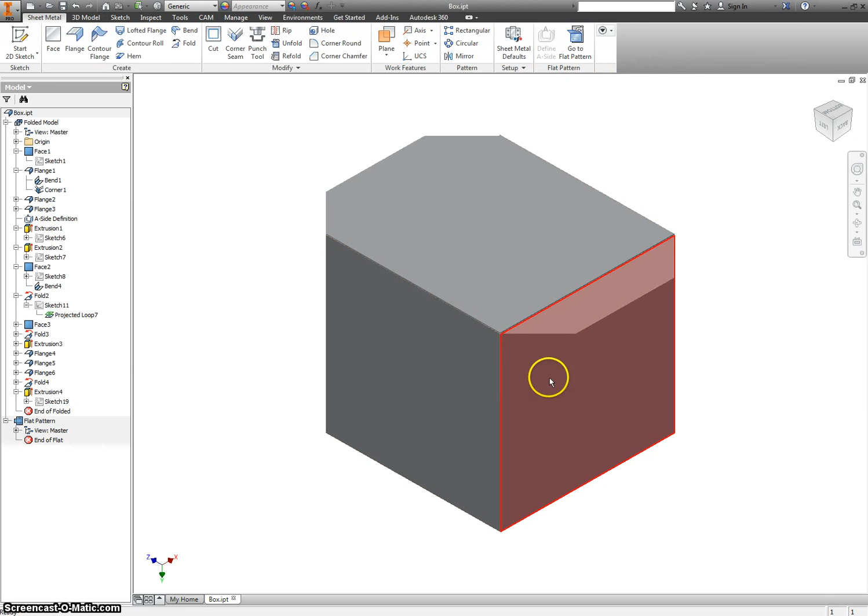Now that you've made your puzzle cube, you're going to want to make a case to put it inside of. While most teachers would have you make something on Microsoft Word with a flat pattern like this, I'm going to teach you how to use another feature of Inventor called Sheet Metal, where you can actually make a 3D box and go to a flat pattern of it. If you have a laser engraver, like we do, you can cut these out in a matter of seconds, and then you can just fold up your box, tape it up, and you're good to go.

So to do that, let's exit out of this for a second. Let's go to New, and we're going to choose Sheet Metal and Create. The first thing we're going to do is say how thick our sheet metal is. We're not using sheet metal, we're using paper, so it's going to be really thin, 0.0025.

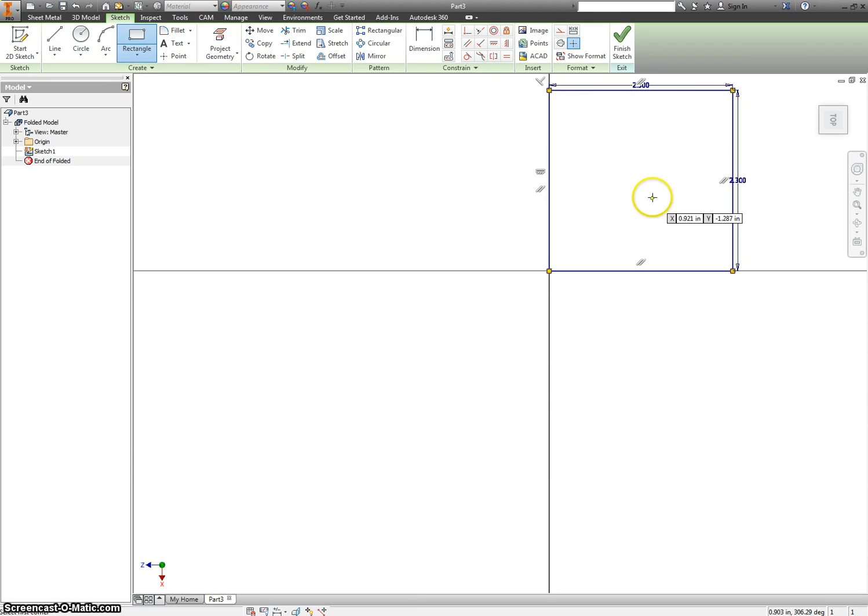Let's go to our 2D sketch. We want to pick the bottom plane here. You may have to actually measure your puzzle cube and see how wide it actually is. It's supposed to be 2.25, but I'm going to say 2.3, because when you glue up some of the pieces and put them together, you end up having gaps. They don't go as nicely together as it does on the computer. So you have a 2.3 by 2.3 square.

You finish your sketch, and instead of extrude, now we have different features up here. We're going to use Face, and hit apply.

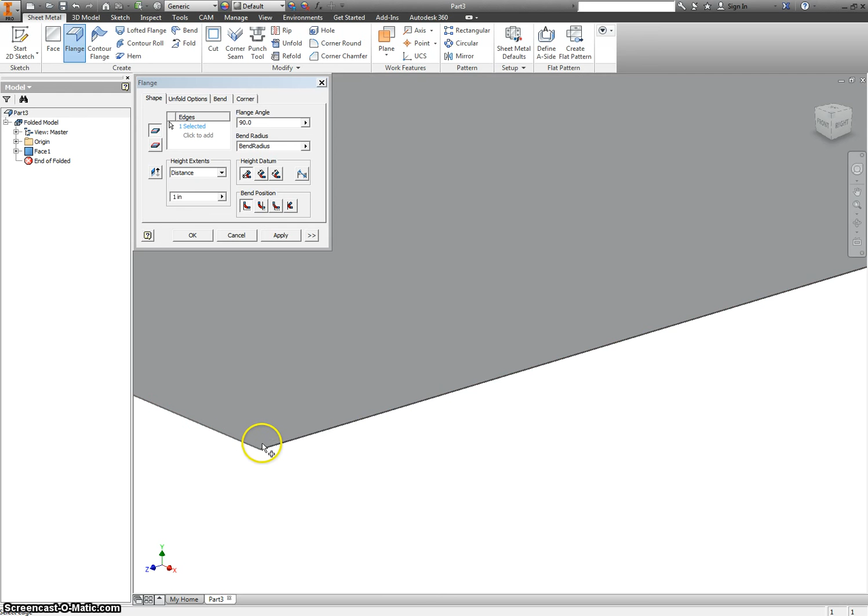Now we're going to add a flange. The flange is going to be on this edge here, and the top edge, so you have a top and a bottom. We're going to make the flange also the same as your bottom, so for me it's 2.3.

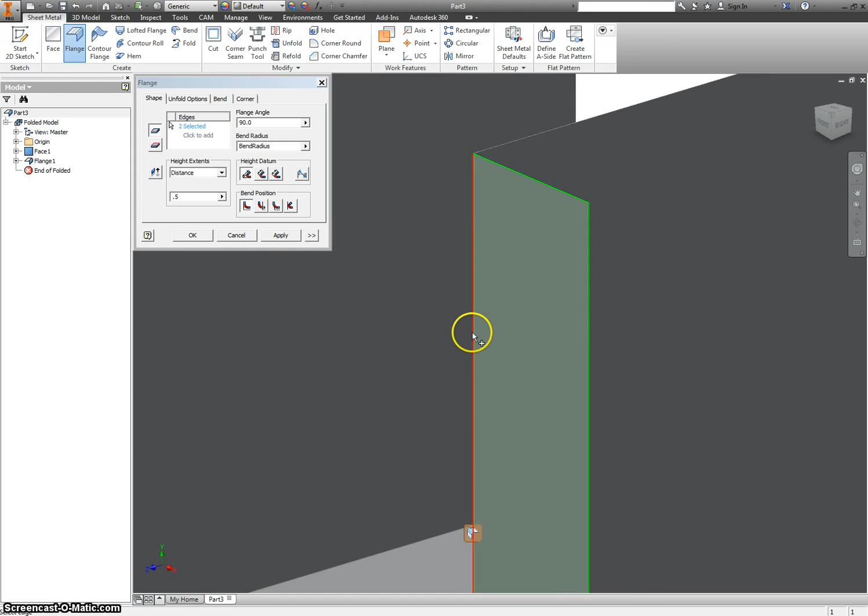We're going to add another flange onto this, and this is going to be much smaller though. We'll say a half inch. We'll pick this inside part here. Oop, got the wrong one. If I hold down Control, I can unselect. There we go. And one last one. Got the wrong one. There we go. So we have a half inch flange all the way around.

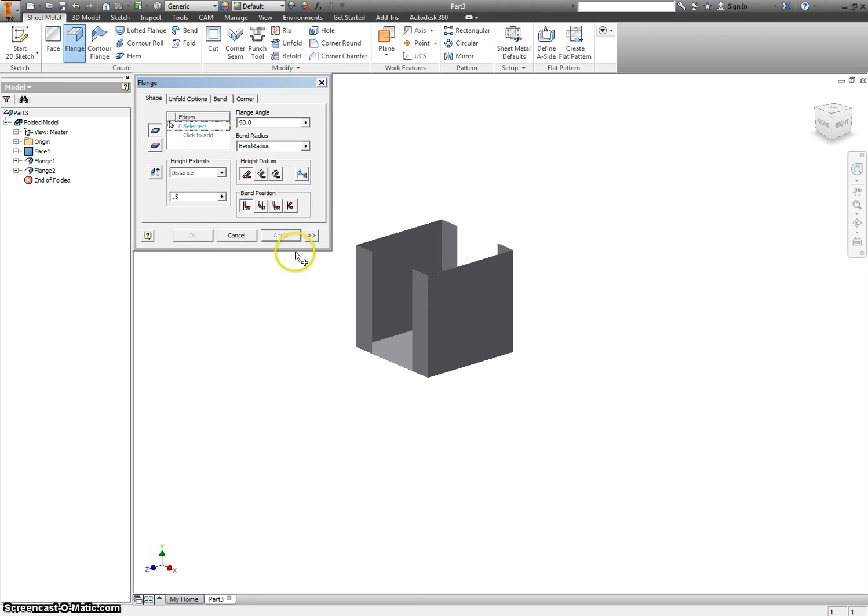Let's hit apply, and now let's make a new sketch on this surface. We're probably not going to be lucky enough that all of these match up nicely, so to make it easier to tape this or glue this together, we're going to project the geometry.

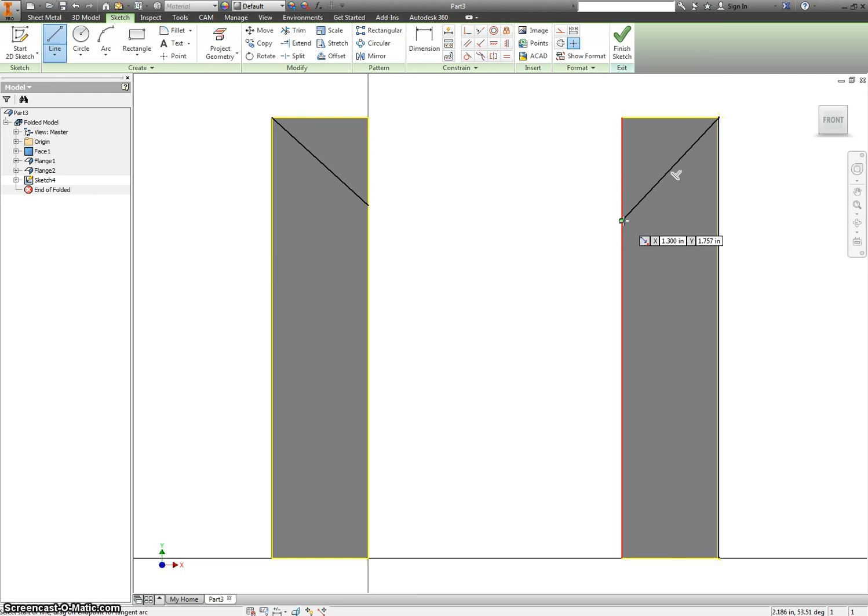And then we're just going to cut off at 45-degree angles each of these corners. This is something where I'm just going to go ahead and put in roughly, then type in 45 degrees afterwards. You could always hit tab to where now your angle is highlighted and you can type in 45. But right here, if you typed in 45, it'd send you out this way, so I'm not going to mess with that. Just to make it easy, let's just go ahead and put the angles in here.

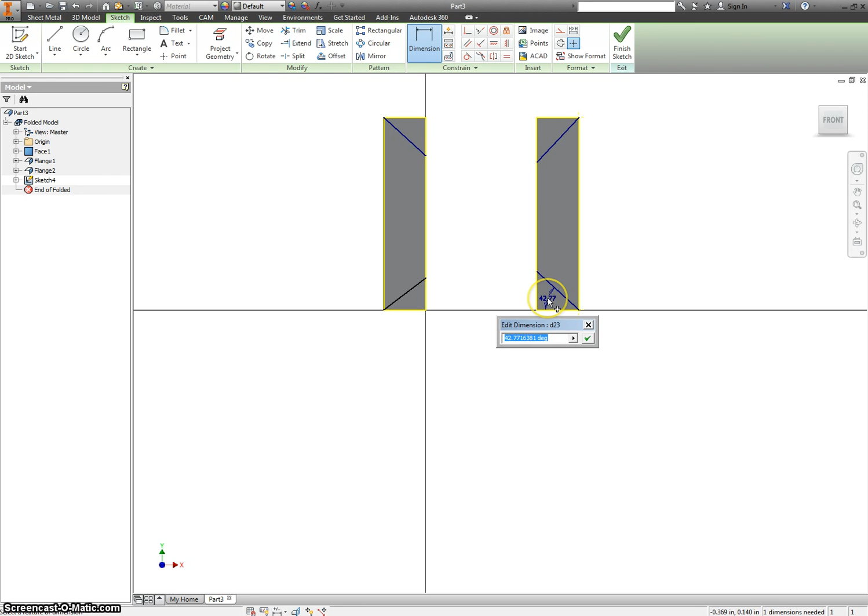Oop, doesn't like that. Is that already 45? It is, we can accept that. And apparently that one is too. This was not.

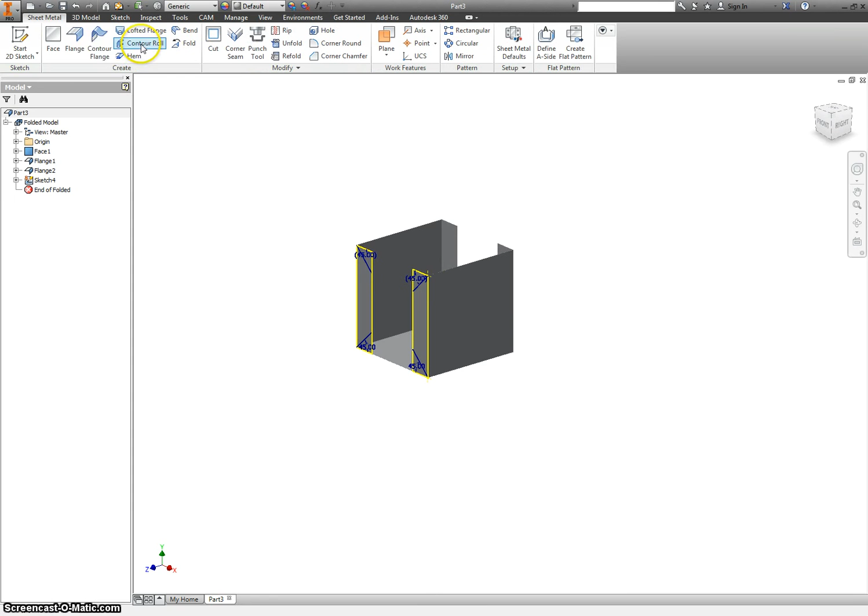Because I projected these edges, it's going to see that as a closed shape. So when I go to cut, which is similar to extrude, and I pick these, I can just get those corners that I want. Hopefully. Of course, now that I say that, it's not doing it. And it looks like I missed a corner here.

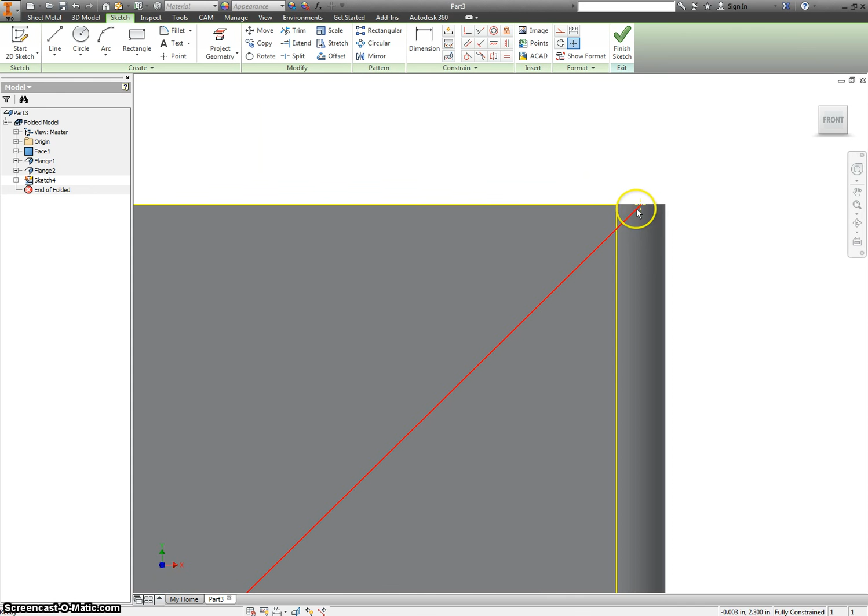So let me go back into my sketch. There's a lot of problems you might come into when you start using sheet metal, but it is something that's worth learning. Just going to delete this out again. Make sure my line starts at that corner. Now I can make sure that's 45. I'm assuming I have the same issue down here, so I'm going to delete the line, make a new line, and then dimension between the two to be 45 degrees. Finish your sketch, go back to cut again.

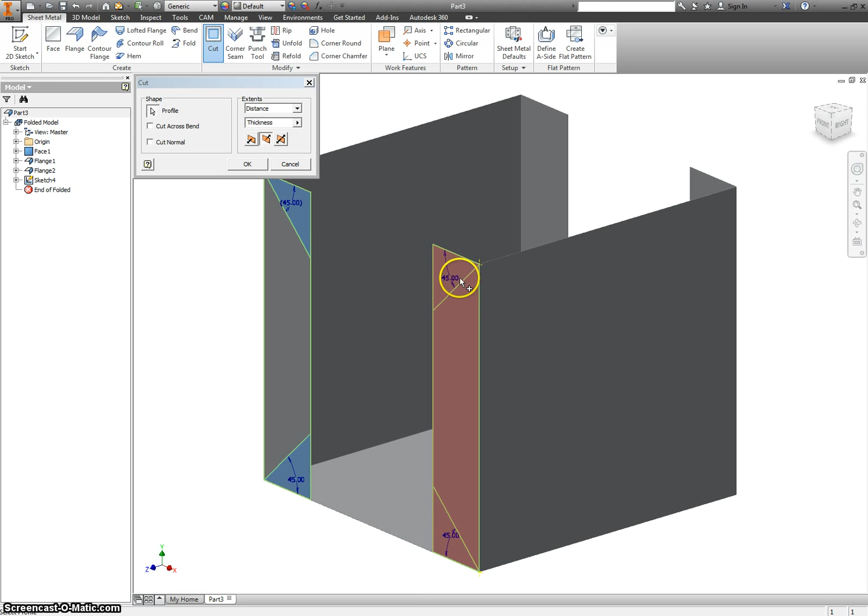There, it's almost doing it. It sees that those two pieces are different.

Sometimes Inventor is just not fun to work with when you're making parts like this to try and select. You have to hover your mouse in just the right place before it highlights just the part that you want.

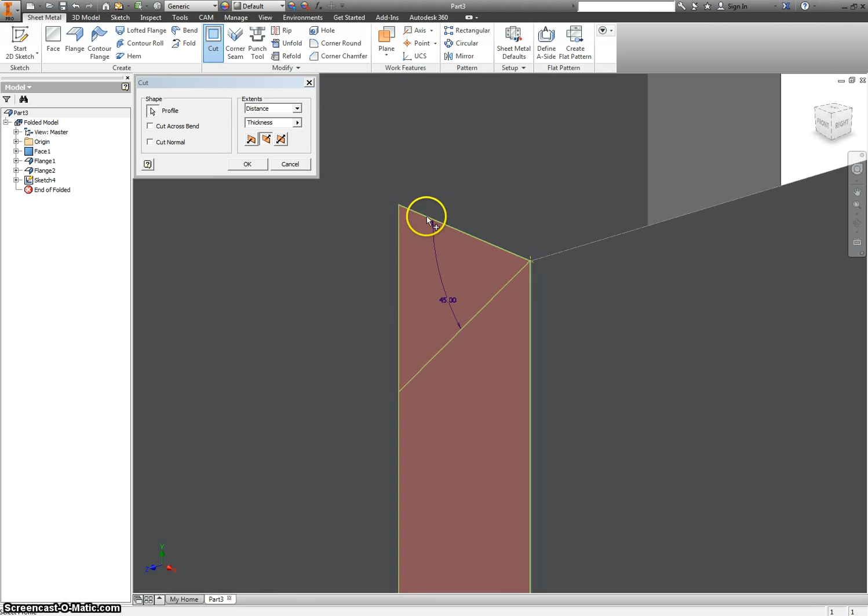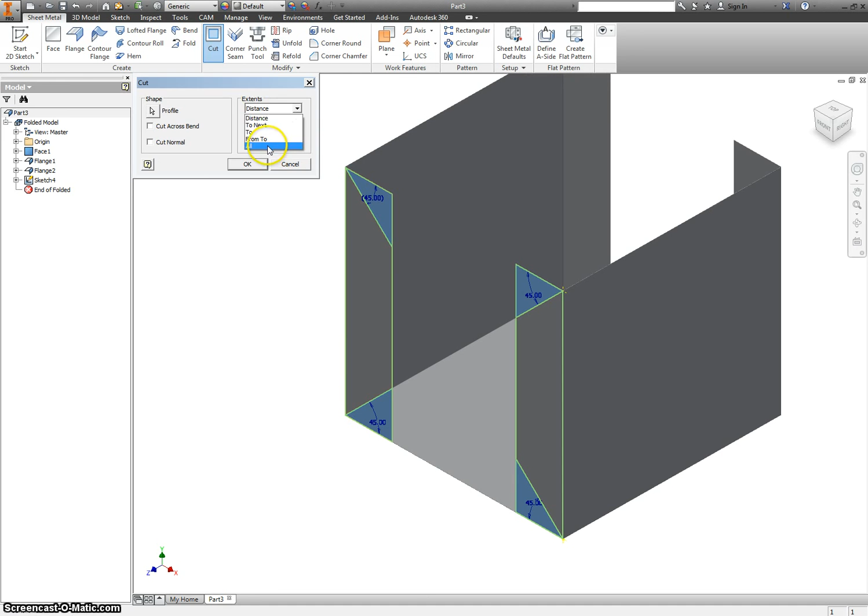I don't know what it's looking for. I think I was having better luck over here. I might even just pause the video for a sec. There, I finally got it. I'm going to change this from distance to all and click OK. And that cuts it from both sides.

Now you'd think you'd be able to do the same thing to the bottom and add a flange here. Not the case. So we have to make a new sketch, because if we did that, it'd end up intersecting with what we had before, and it doesn't like that. So we're going to project the geometry of the bottom. Pick my 2-point rectangle.

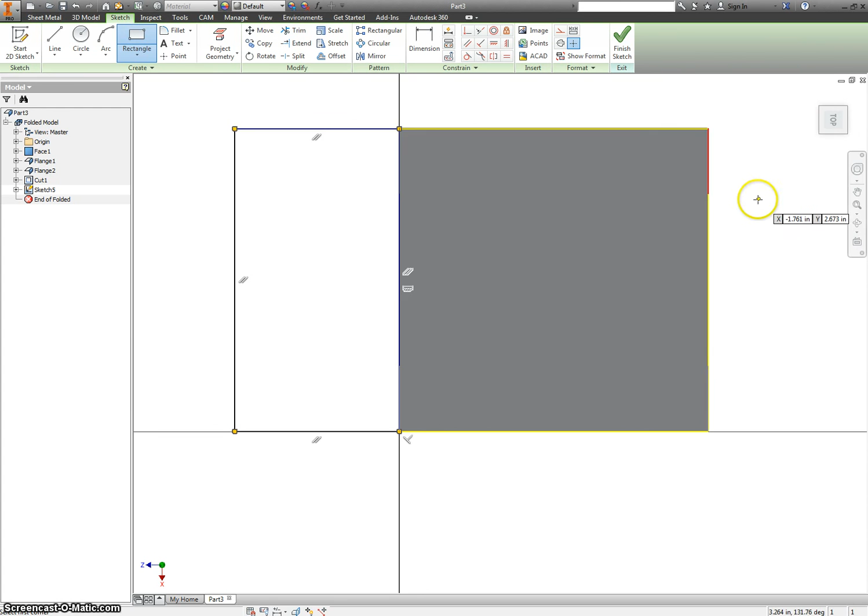By the way, if you're wondering where that menu is coming from, it's just a right click. Okay, I'm going to make this 2.3. This one, I'm going to reference this dimension. I'm going to multiply it by 2. So it's actually 4.6. I'm going to finish my sketch.

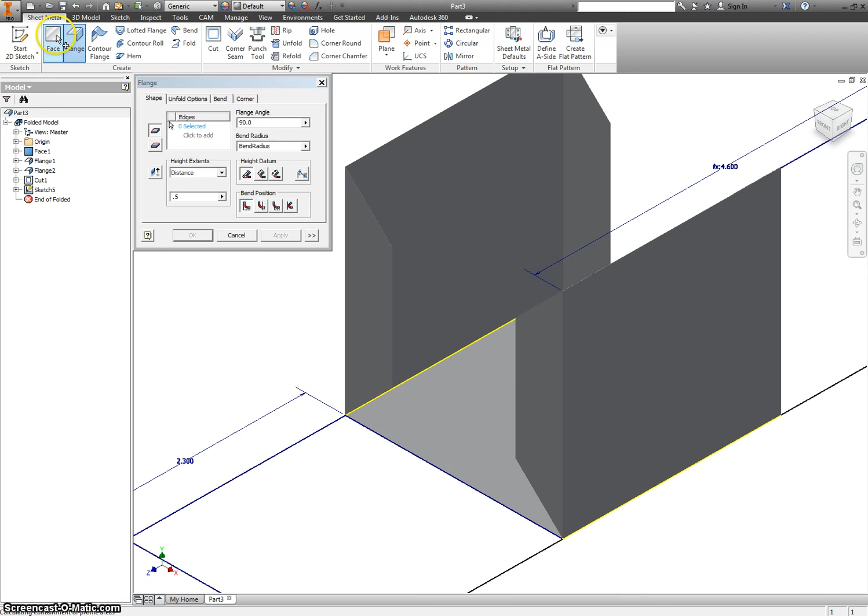I'm going to face both of these, so I'm adding a thickness to it. I'm saying this is a face.

Alright, now I'm going to make a new sketch on here. Which I know I just made a sketch. Now I'm going to go back and make another one. I want to show where this edge was. Also want to show where that was. Like, select the line.

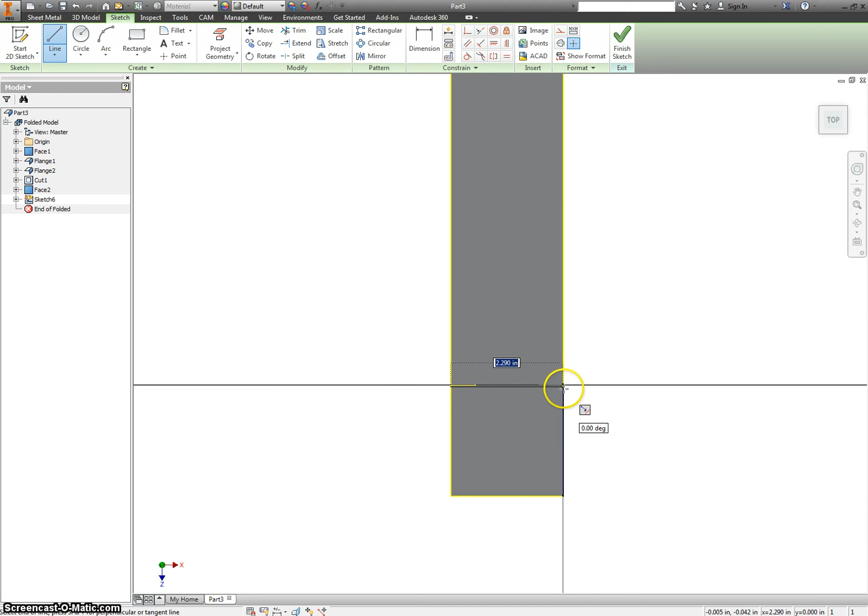This is not as precise as I'd like it to be, but it's the easiest way to do this, and for what you guys are doing, this is fine. So we're just going to draw a line across, and we're going to get it, if you zoom in close, we want to get it close to where that other line was, but not overlapping. If you overlap, you're going to get errors.

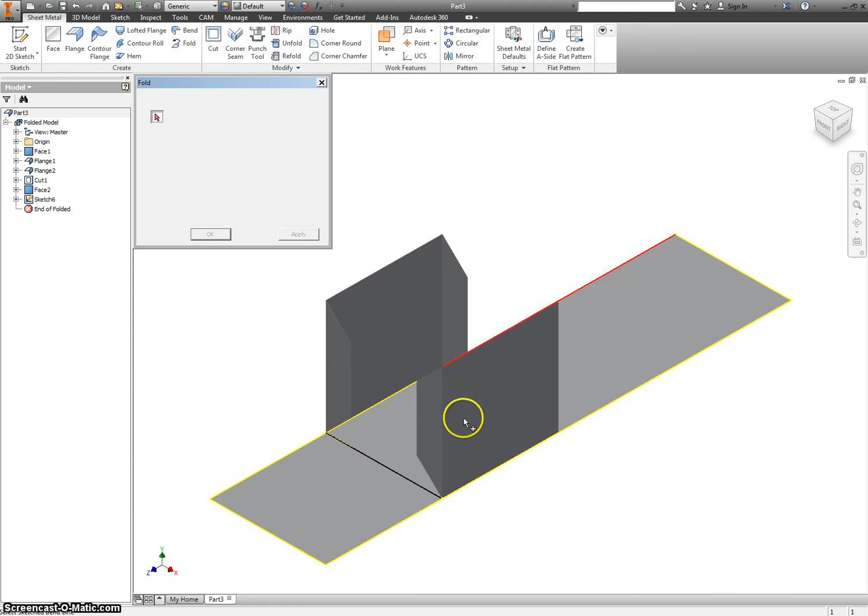Okay, so we're going to finish this sketch. We're going to say fold on that line. Look at these arrows. These are not pointing the right way yet. We want this to go out and up and hit OK.

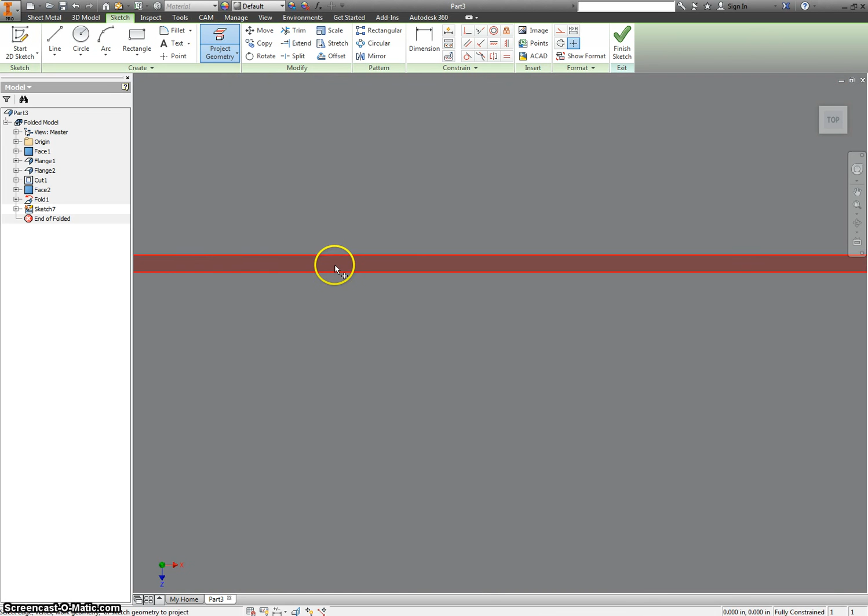Do the same thing with this one. I'm going to make a new sketch. I'm going to project the geometry of the outside and of this little piece here. Grab my line tool, draw a horizontal line that goes all the way across. Make sure it stays horizontal all the way, perpendicular line. Also need to make sure that it extends all the way out to those sides. Looks like mine didn't on one side and did on the other. That's good enough, I guess.

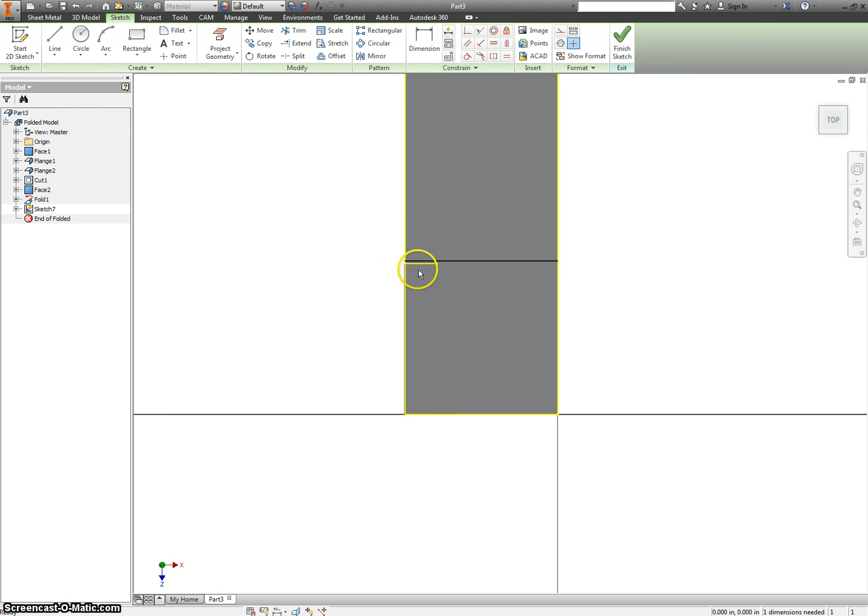Drag this down. Again, you want to get it close but not touching. Finish your sketch. We're going to fold that now. This is pointing the right direction, so I'm going to click OK.

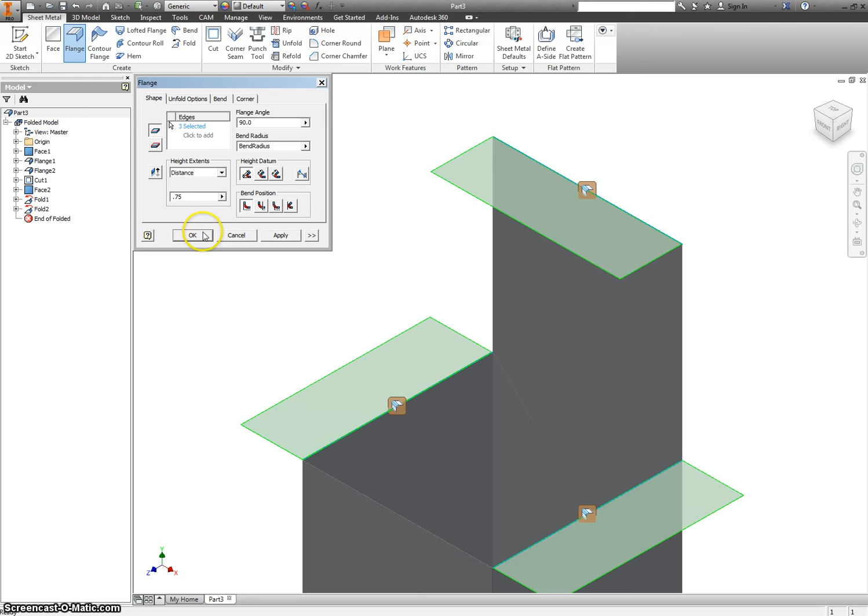Alright, we're going to make a couple more flanges. Half inch looks fine. And we're also going to make a flange for the top of your box, and let's go a little bit bigger than a half inch. How about 0.75 for that one? We'll do 0.75 for all three. That's fine. We'll make these a little bigger.

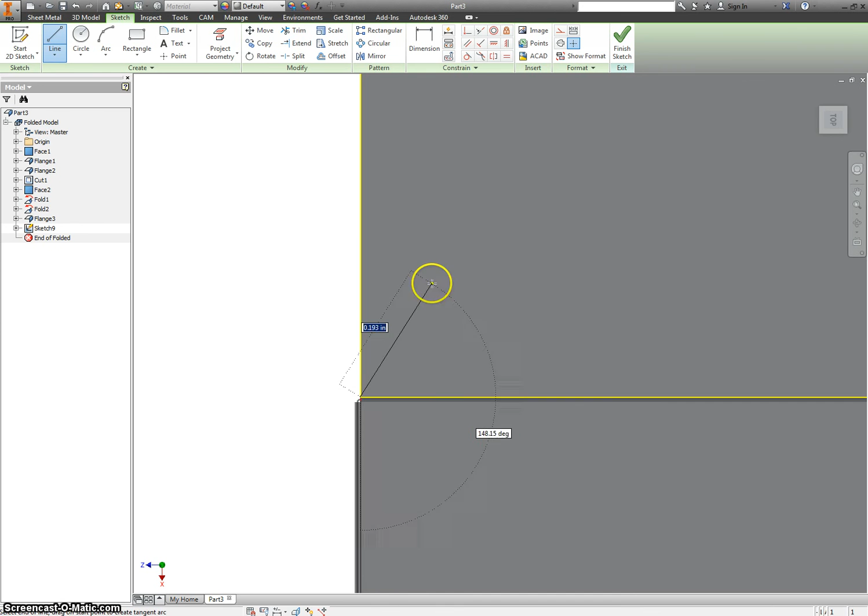We'll make a new sketch here. Project the geometry of those two rectangles. Switch to your line tool. Make sure I grab the corner this time. Put in my 45-degree angles.

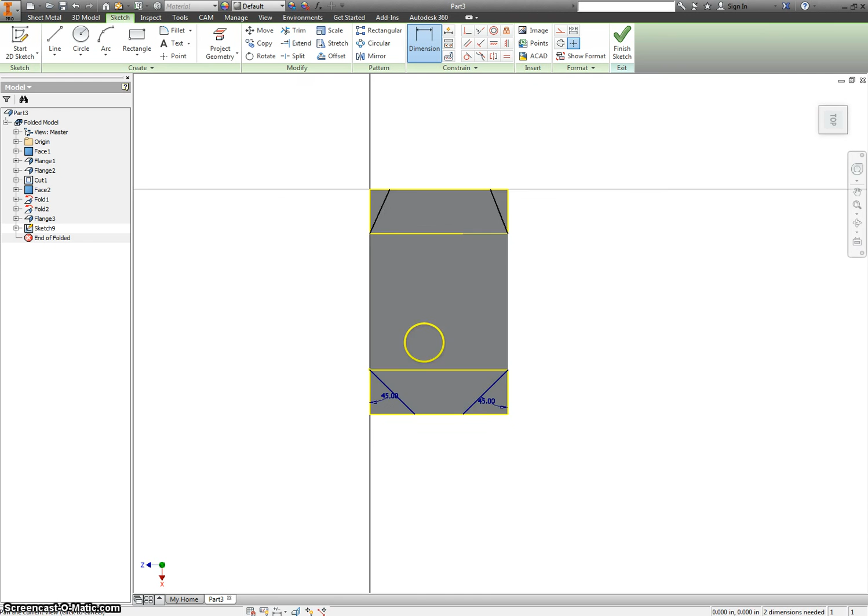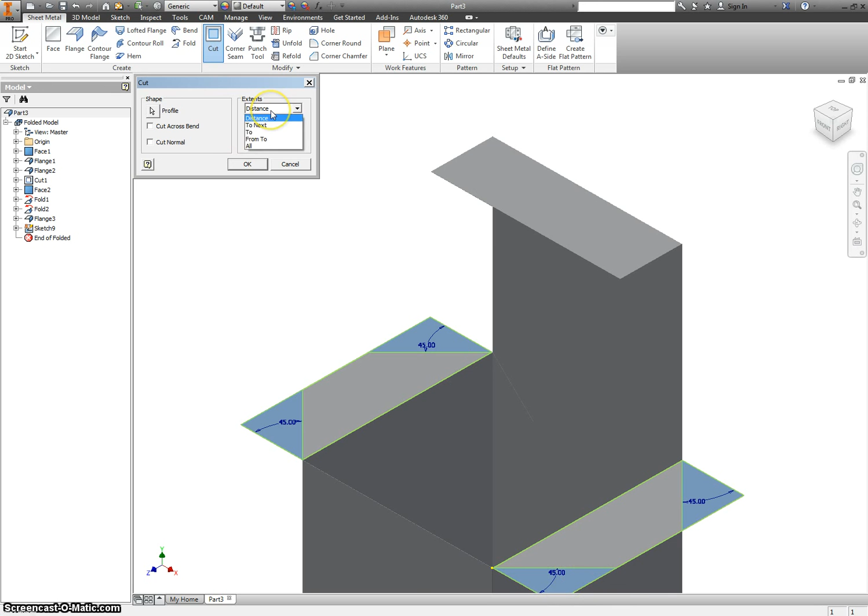Finish your sketch. Go back to cut. We can just use distance. That'll be the thickness of whatever the metal was, in this case, paper. And then we're also going to cut here.

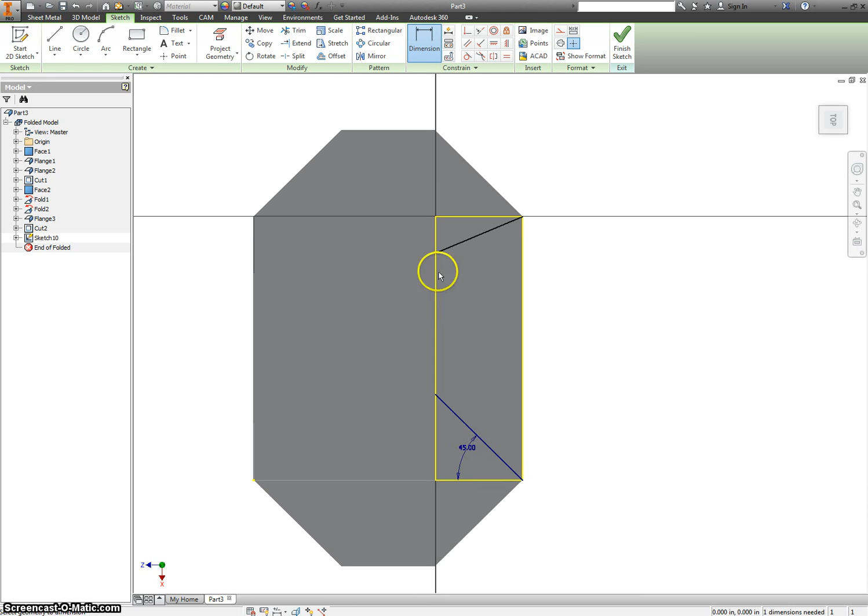And I'll make these 45s as well. Go back to cut.

And now here comes the fun part. Go to create a flat pattern. And this shows you what this would look like to cut out, how much paper you would need.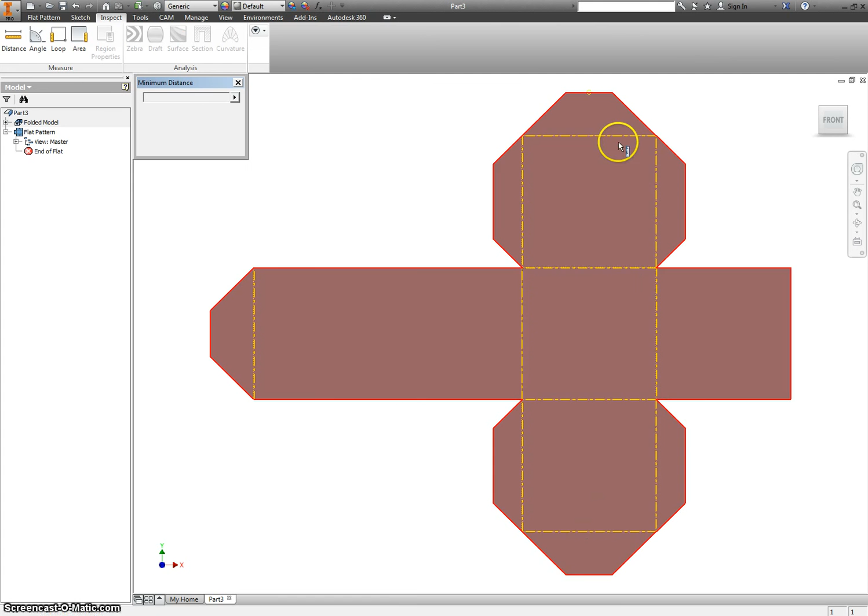And if you want, you can go to inspect. You can check that this will actually fit onto a sheet of paper. So that's 8.38. From here to here is 9.94. Normal paper is 8.5 by 11, so we are well within that.

And when you bring this into your drawing, then you can add text and features and all kinds of stuff on this, and you are good to go.